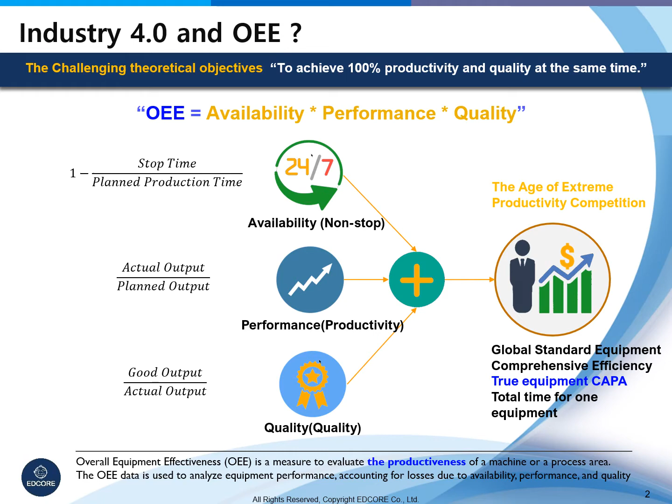OEE, overall equipment effectiveness, is a hot topic in Industry 4.0. The goal of the OEE is to represent an ideal level based on theory. In terms of sales, it's an indicator that one should get 100% for all non-stop equipment, maximum production, and zero defect quality. While equipment has physical limitations, increasingly fierce competition in this area will require a different multidimensional strategy.

The essence of Industry 4.0 is, to put it simply, to work effortlessly but dramatically increase the OEE. In general, manufacturing companies invest in equipment to gain competitiveness in the market and to reduce the disinvestment period as much as possible. We have focused on improving productivity through intensive process innovation. The competitive manufacturing market ahead will eliminate the remaining losses, which can improve the overall equipment effectiveness.

When I saw the slogan in a factory, "An accident can occur with a moment of neglect, the employee responsible will be punished," I realized how inhumane management has become.

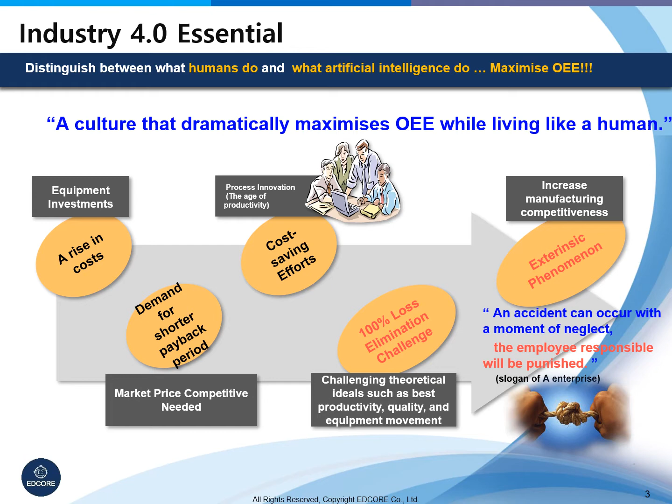In the meantime, systems in the information age are used to prevent loss in the field. People use statistical analysis to create a reference value and set the system accordingly. When a problem is detected, most of the time people find out root causes about it in real time. It's a human engineering first, post-system approach.

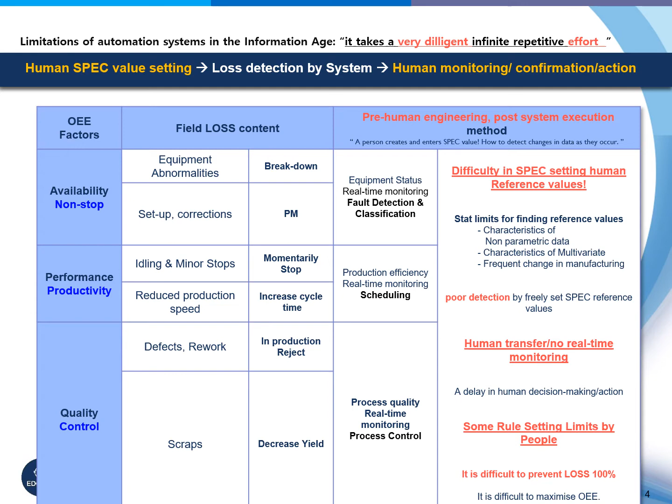In the system, you can't achieve OEE because it requires a lot of engineering effort, and there is a practical limit to modeling an accurate reference value. If this engineering effort and modeling is limited and insufficient, the detection sensitivity decreases, resulting in a loss.

Quality innovation has evolved from job-specific activities and the mass production customer development process. In the 2000s, there was a cutthroat competition that expanded to Six Sigma quality management. However, even in the OEE era, will this mantra work?

If it is based on human effort, it would require 24-hour real-time engineering, which is beyond human limits and most enterprise resources. Management systems adopted this approach, from which we have modeled a number of baseline values. To improve the OEE, a new method of quality innovation is needed that focuses on people and enables 24-hour real-time engineering.

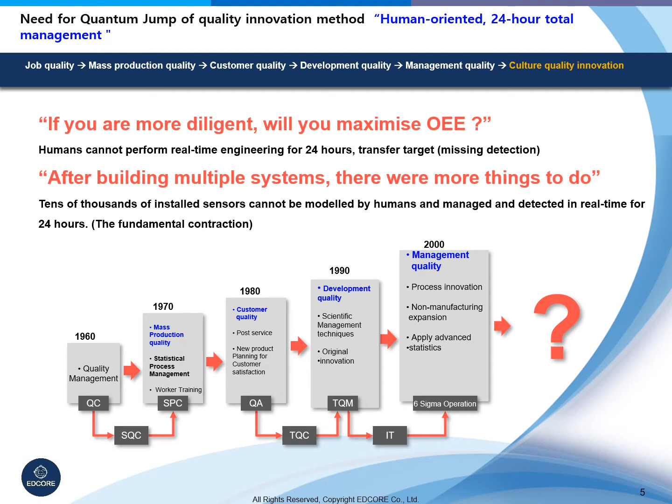The following illustration depicts the innovation in traditional manufacturing. Whether it's a device industry or small and medium-sized manufacturing, common equipment production and process technology are critical. Because the goal of manufacturing is to keep the equipment non-stop, maximize production, and avoid defects, the engineer is responsible for monitoring, evaluation, root cause analysis, planning, and taking action.

To continue to innovate this part, we've simplified and standardized this process. ERP, MRP, barcode, etc. at Level 1 are computerized. However, in the case of the process device industry, such as semiconductors and displays, requiring large equipment investments, which have faced extreme cost wars in the marketplace, enterprises went beyond computerization to Level 2 automation.

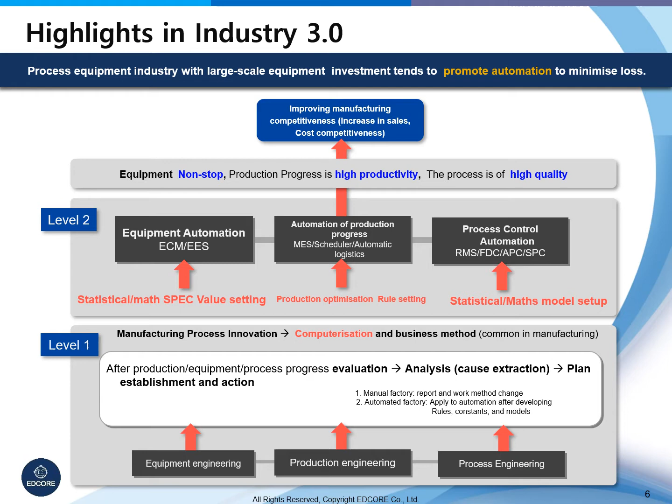At this time, the philosophy of the Industry 3.0 information age was early sensing and speedy response. The goal was to detect real-time loss at the site and take action quickly. The automation of this era was through statistical analysis to determine values of control criteria. It required finding production optimization rules, developing various models, and applying them to the system.

In other words, to revolutionize equipment production and process engineering with computerization and automation. There still remain losses because there's a lot of human effort required. In Industry 4.0, this is the essence of the competition. Let's take a look at how we can overcome it with Level 3.

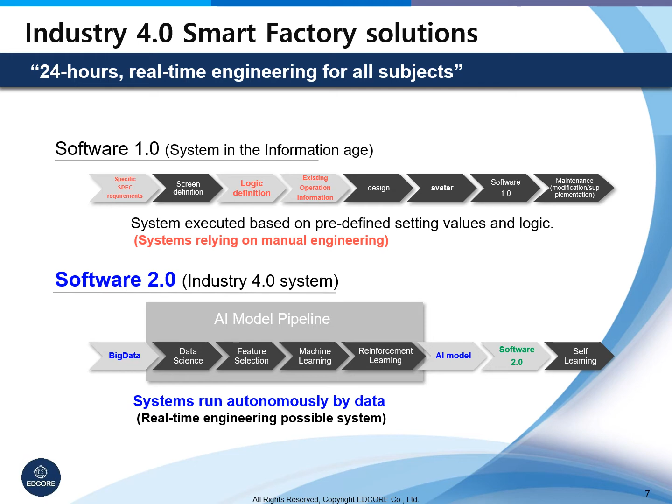In Industry 4.0, artificial intelligence is critical. The key technology that enables 24-hour real-time engineering is Software 2.0. In this information age, traditional systems such as ERP, SCM, MES, etc. have a framework, but the content is made up of specific people's requirements.

Engineering activities must be carried out in advance, setting and updating logic and reference values for operation. It means that there are many things that people have to do before running the system. To alleviate this effort, Software 2.0 has infused intelligence into the software. This intelligent software creates AI models with big data and enables applications to take advantage of events in a real new environment to evolve autonomously. We should transform these traditional software to be Software 2.0 for Industry 4.0.

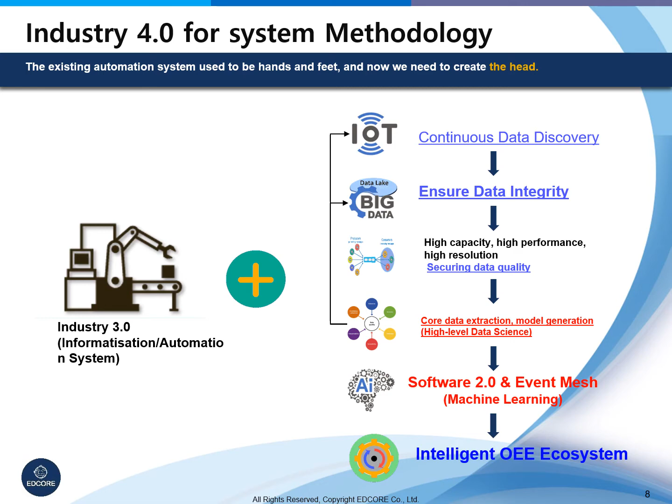Let's look at the methodology of building Software 2.0. Industry 4.0 system is not separate from the existing information age system. It is similar to the process of human statistical analysis and big data engineering of the past. The difference is doing unlimited iterations and working on endless data science activities until an optimized answer is reached.

Artificial intelligence will find out root cause and the relationship between the cause and effect to predict the future. This is what it looks like running based on event mesh, constantly searching for answers through mutual event exchanges. In other words, artificial intelligence continues to do engineering instead of people. At this time, what the engineers need to do is continuously discover data and try to improve data quality. We'll cover that later.

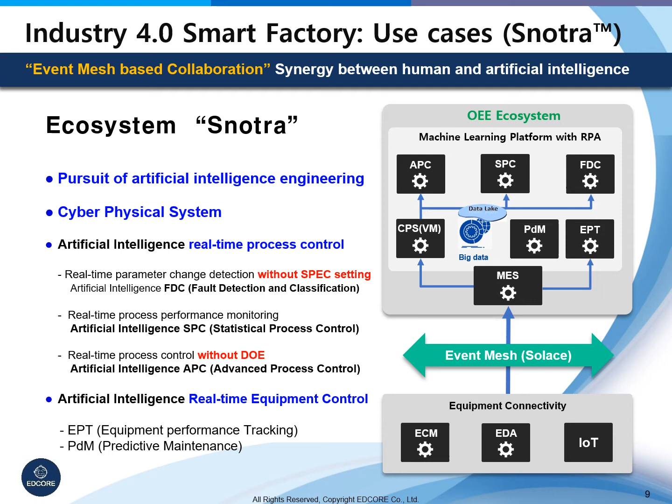As a practical example, using a solution called Snotra, we will explain the vision of the Industry 4.0 Smart Factory. Snotra developed for OEE an intelligent process control ecosystem. Several artificial intelligences developed as a real-time machine learning platform tightly connected by event mesh based on virtual measurement, cyber-physical system. Following services are implemented with this philosophy.

FDC without specification setting, SPC without prior statistical analysis, APC without DOE, and virtual measurements, etc. In a manufacturing environment that changes without human intervention, process engineering is performed in real time 24 hours a day. Let's investigate a few key functions.

First, in artificial intelligence, there is a ridiculously difficult situation, that is, manufacturing environment changes force us to retrain the model continuously. Therefore, advanced self-learning techniques are needed. This self-learning is not only reinforcement learning, but also the domain knowledge based on systemization.

Second, in the manufacturing environment, the key causes must be extracted as quickly as possible and modeled accurately. Realistically, however, it is difficult to improve data science capabilities in a short period of time. For small and medium-sized manufacturers, hiring data scientists is very difficult. That's why easy, fast, and accurate machine learning solutions are indispensable for smart factories, smart farms, smart distribution, etc. In every field of artificial intelligence application, this concern is a general issue.

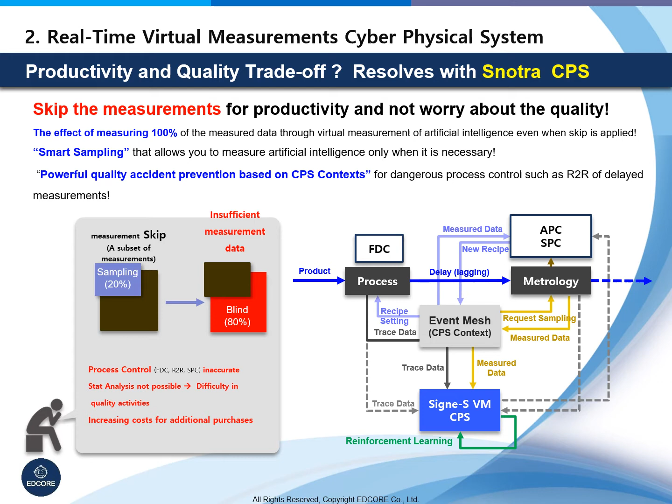In Industry 4.0, for achieving highest productivity, artificial intelligence becomes a close human companion. Human beings making the most of artificial intelligence to create synergy is the key to success.

Intelligently guided smart sampling provided by CPS is a valuable feature. In addition, CPS provides current and future process performance trends throughout the plants based on event mesh CPS context. It prevents quality problems caused by existing process control malfunctions and dramatically improves root cause in chronic FDC problems. The CPS based on event mesh Snotra VM is key to enabling AI-based smart factories.

The most important part of manufacturing is the sensor. It is difficult to set up accurate specs for many sensors, even if they've done modeling numerous times. In the case of semiconductors and display manufacturing, fine-tuning the parameters of equipment has a significant impact on quality. Also, we need these interlocking mechanisms for control. Most of the sites have difficulty setting up specs for sensors. If the environment changes, setting has to be repeated.

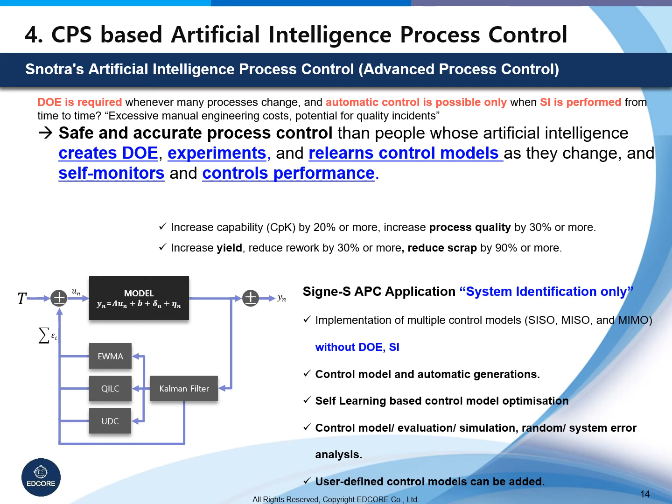Finally, the task of analyzing the process and creating a control model is now possible with artificial intelligence. Process control system refers to a control device that automatically adjusts the input conditions of the process to accurately achieve the quality goal. In the case of discrete factories such as semiconductors and displays, it's called R2R.

As with these chemicals, the R2R control systems must experiment with DOE for many processes to create a control model and update the model frequently as the environment changes. Traditional R2R control systems are struggling with these engineering challenges, and there's a huge cost of development and operation.

In addition, process control errors caused by inaccurate data are directly linked to large quality problems, so not only passive control is required to avoid them. Artificial intelligence Snotra APC is executed by simply doing system identification for the process. The rest is left to the artificial intelligence because AI does the real-time engineering for you. We support SISO, MISO, and MIMO control models without DOE and SI. Most notably, artificial intelligence automatically controls by self-learning on CPS context, providing safety and accuracy that are far better than

those in the past. In The Third Wave, Dr. Alvin Toffler wrote, "Human beings are anxious about the new environment and try to return to what they're used to, and at some point he finds himself adapted to a new environment. Human beings cannot stop future progress and change. We have to be ready right now, as Industry 4.0 manufacturing is expected to compete fiercely to maximize OEE with the help of artificial intelligence."

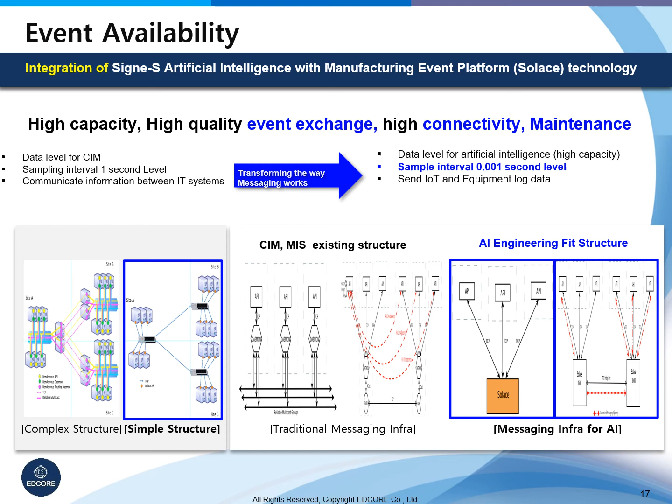The event platform is built on high capacity, high quality, high connectivity, and high maintainability. Snotra leverages Solace's technology and event platform that has dramatically increased maintainability with a simpler structure and is very powerful in performance and reliability. This is because these technologies need to be leveraged to handle Industry 4.0's 0.001 second or less sampling data and events.

The most important re-engineering topic is MES, the backbone of the production system. The information age system is not the Industry 4.0 system and needs to be changed. In the past, for semiconductor manufacturing, during the change from 200 millimeter wafer production to 300 millimeter wafer production, there were a lot of problems that cropped up that had not been anticipated before. They were solved and the transition was completed.

Industry 4.0 MES requires artificial intelligence, which needs to be able to handle unexpected issues of high capacity, high density data, and more considerations will be needed with respect to data quality. Features and data that were not required by the existing CIM will be added. For artificial intelligence, measures of quality data from equipment, processes, and infrastructures will likely be required in all areas. In conclusion, MES needs to transform itself into an artificial intelligence capability with new architectural technologies based on ecosystem and event mesh.

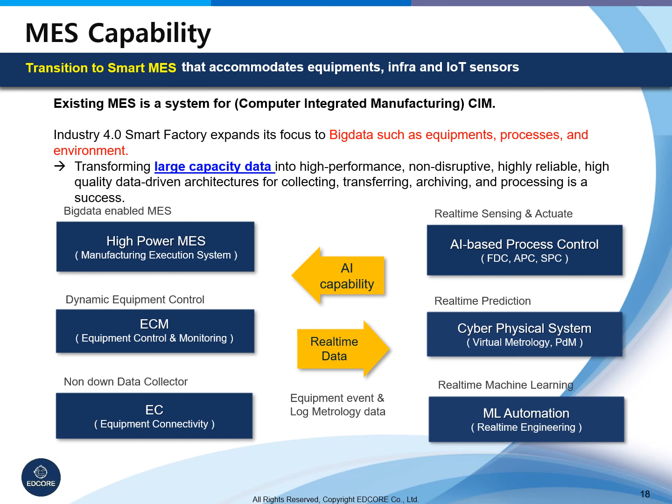Lastly, to become a smart AI, you need big data that can learn from many perspectives. The data of the existing information age system may be less than 1/100th of the data that we will be able to benefit from for the next generation, which means that continuous data discovery efforts are needed. In addition, data discovery efforts make data connectivity important. One example is sensor data and data transportation capability. We don't know where the sensor is going to be. We can't necessarily put in a cable, and there's a lot of radio interference in the field. Snotra solutions are wireless and use mesh network technology.

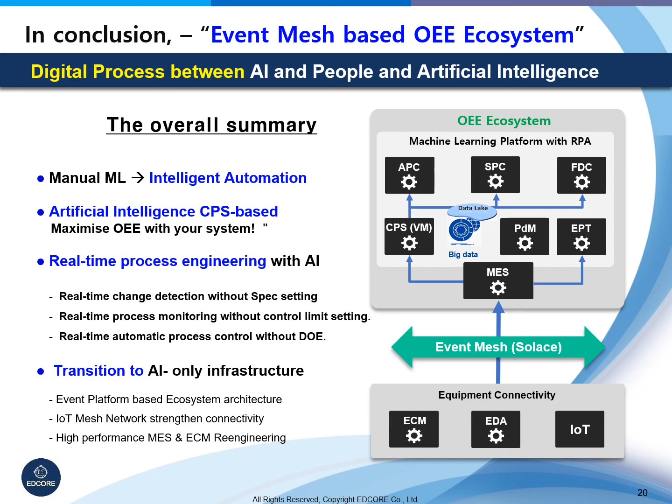I've explained Industry 4.0 smart factory so far. Artificial intelligence and people need to work together to improve OEE. To work with artificial intelligence, we need to quantum jump from the existing systems and infrastructures. If you aim for OEE without doing re-engineering, you cannot do anything, fail, and lose. In order not to be swept away by the tsunami, innovation is needed right now. In this era of Industry 4.0 manufacturing competition and the digital process war by people and artificial intelligence collaborations, the first step is to distinguish between what people should do and what artificial intelligence should do.